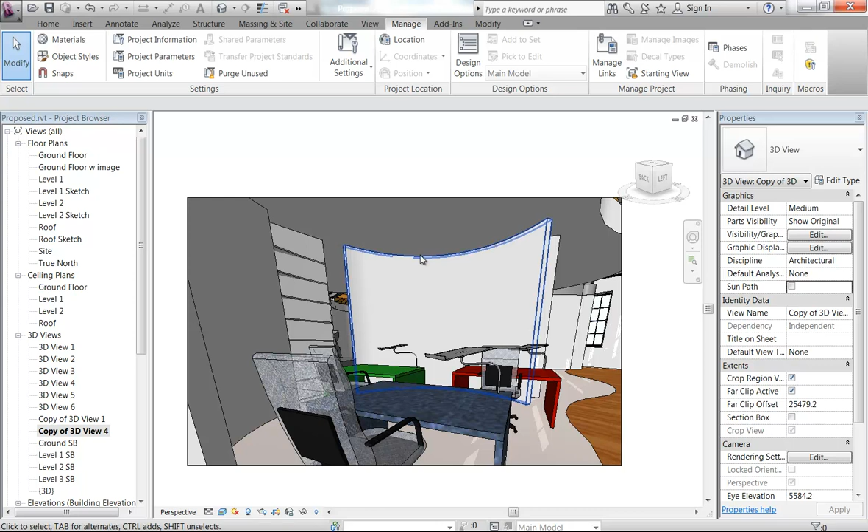I'm going to export my FBX again and go through the linking from scratch because I want to make sure that's crystal clear to you how this process works before you get to do it the easy way in 2013. So on the export submenu, FBX.

Before, I showed you that you can put it into the Revit files folder. You can really put it wherever you like, but oh no, I don't have my import folder already. I'll make it. So I'm going to put it into this 3ds Max files folder, and I could make an import folder. So I'm changing my mind here. I could make a folder called import there.

What I'll do instead though is, sorry, just quickly switch to 3ds Max because it's a good chance for me to show you something. I'm going to set my project folder. So on the main menu, you can choose set project folder, or you can just click on the set project folder button on the quick access toolbar there.

So then I'm going to browse to the CAD 3 folder, which is, I thought, where I've been saving. Sorry, I'm going blind here. Is it Loftus Street? Oh yes, okay, so I've made Broadway there. So Broadway 3ds Max files is my project folder.

Okay, so now you'll see back in Revit, that's the same folder I was just looking in, and it's added all of these new subfolders. So that's what setting a project folder will do for you. It makes all these complex folders that 3ds Max needs, so that you don't have to go and do that. So the import folder there is there for things like this that you're going to import into Max from Revit. I'm going to save it there.

When it wakes up, it should let me... okay, here we go, that's the message you should see. It was just telling me that I need to restart the program. So I'm just doing that, and it won't take long. Just pause the video there.

Okay, so you'll see now that I've restarted the program, it's going to behave quite differently when I go to look at some of those rendering options. You won't know until you go to look at the rendering that it's a problem. So I'm going to go to the File Link Manager, again File, grab my FBX, set the preset, and attach this file.

Wait around, let's pause the video. Okay, so we're back to where we were, I just have to give it a minute, and there we are. So that's now displaying the way it was before, essentially, but you'll see a big difference.

Firstly, I'll just set the exposure control back to MR photographic, not logarithmic, and choose the same preset. Then the camera view I'll set again, on the perspective label there, cameras, 3D view. You can see already it's actually displaying much better, even though it's in Realistic, because it's using mental ray, it will give you a better display.

Now the lighting and shadows here is set to illuminate with default lights. I'm going to set that to scene lights, so they're the lights in the scene, like the sun in this case is the only light.

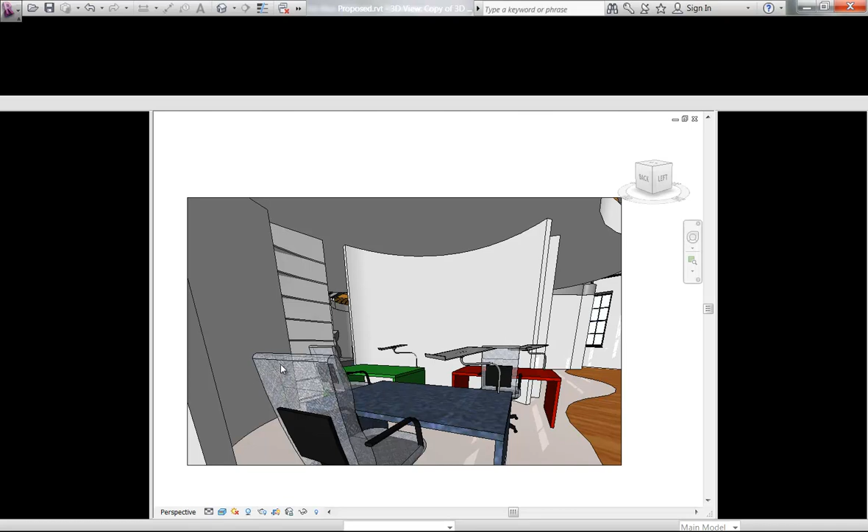So if you were to do one of these in high, how long would it take? Oh, if you set it up properly, I could get it down to 10 minutes a frame. So it's not like a 3-day cycle. No, not for small images. For posters it can still be maybe a day, half a day really, but maybe a day for a really big billboard or something.

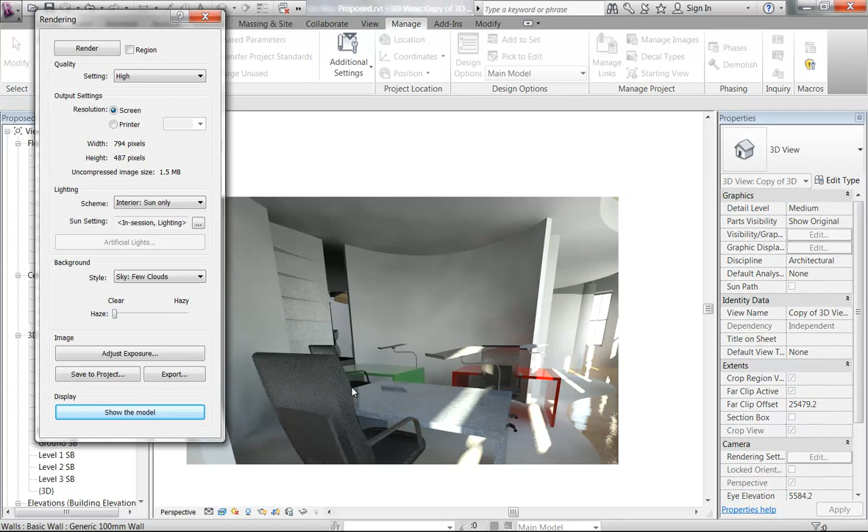So there we are, you can see that material there, how it's all still a bit - I can't even describe what's wrong with it, but I know it's wrong. And in 3ds Max, even on draft, it is far, far better. The transparency there, it's meant to be a transparent material - you couldn't even tell in Revit. Okay, so...

Lots of things like that, and the lighting as well, much, much better. I still have to turn on a lot of the really good material settings, and I'm going to go and do that for you right now. But already that's starting to come together. So I'm going to cancel that one as well.

I won't wait for that to finish, and I'll go through materials now in 3ds Max. But how good is that, getting the floorboards and everything else from Revit, so you don't lose any of that work. Unfortunately, if you're using ArchiCAD or something like that, you do. But Revit, it's all in the family, all Autodesk, so all of those things come straight through into other Autodesk programs like 3ds Max.

It might not seem like that big a thing, but I can tell you in the past that was a massive workload, having to redo everything you'd done in your CAD program when you went over to your 3D program.

Okay, so yeah, yep. And you may not even need to do much more to it in 3ds Max, but you can if you want to. So I'll go now and do a lot of work with the materials.

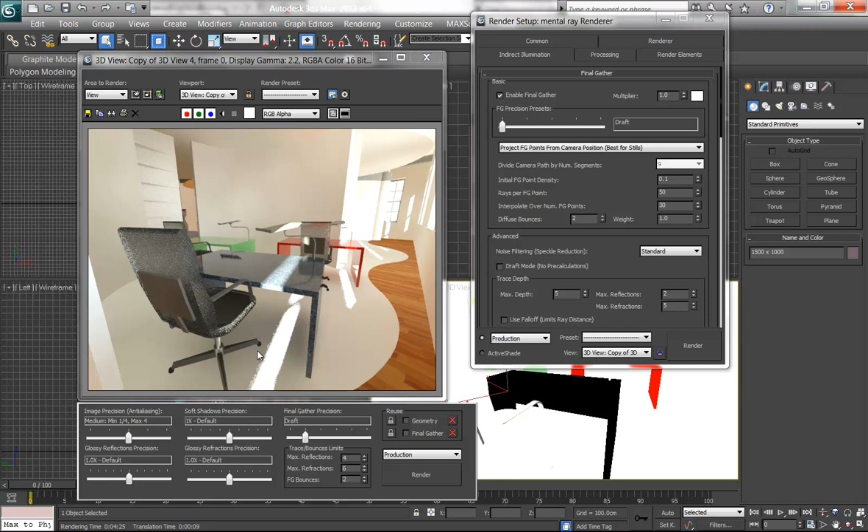You can probably tell my display is going a bit slowly. It's taking a while to update because there's a lot of complex lighting going on now. So I'm going to turn that back to shaded, so it just has a basic shaded display without any lighting, so it works more quickly.

I'll do a more interesting laminate one maybe on this desk first. So I'll start with it. Let's have a look at what it is.

I'm going to isolate that just so I can see. Okay, so that's come in as one object. Now, I don't want to make this too complicated for you.

I'm going to go back and use the material editor to get that material for you. With the material editor, on the main toolbar there's the sphere with the checkerboard, or under the rendering menu you can go to material editor as well.

Now here you've got an option to choose between compact and slate. If you click on the button on your toolbar, it'll probably take you straight into your slate material editor, which is this one, and you probably don't want to start with that one. So you can go to the modes menu and choose compact from there, if you need to go back to the compact one.